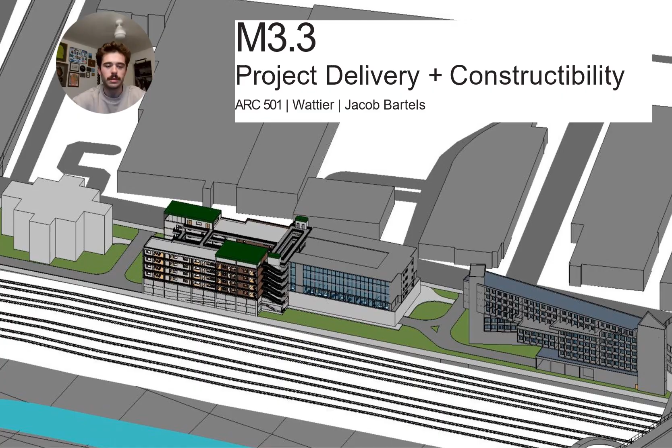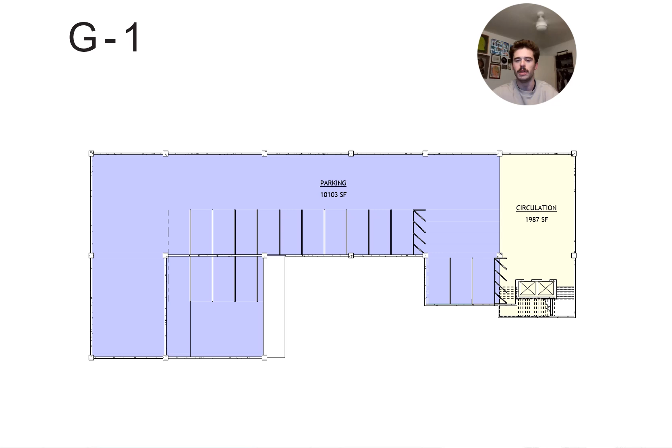So I ended up having to go down a level, which I didn't really want to do, just in terms of cost, and also being right next to the canal. I would imagine that it is not that easy to dig. I'm not sure, but it's relatively small, just pretty much like a half level of parking. Yeah, 10,100 square feet of parking, and then it's got little access to the circulation.

So here is ground level G1. You can see you come in the parking at the left there, bottom left of the screen, and you can go straight up the ramp to level 2, or you go left, down and around to down below. Obviously connected to the circulation, most likely going to be connected through to the parking garage of Lauren's building, adjacent to mine.

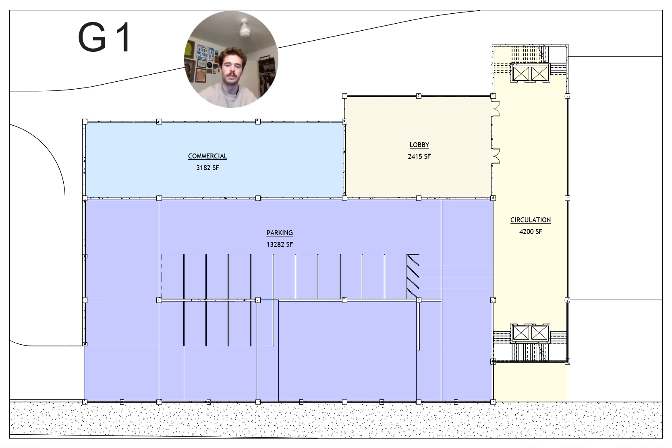Got the lobby and then commercial space. I'm yet to decide what the commercial space really is going to be, if it wants to be one commercial space or split it. So I'll have to figure that out. And then when you get up to G2, this is the last level of the podium, the concrete structure underneath. It houses a large mechanical room, and then that says lobby, but that's just open to lobby below.

And one thing that I did consider is just security in terms of public versus private access. Having the open air circulation definitely might pose a challenge in terms of security, especially being in the area we are, I guess. But you'll see in some of the axonometric views that I built up, there's really no access into the circulation unless you get above ground level.

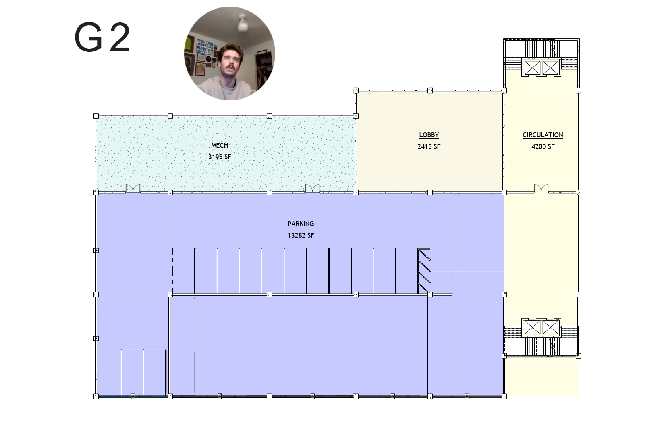So L1, this is the start of our steel frame structure and start of housing residential units as well. This one's got a big terrace down below, just because we've got the space on top of the podium and might as well take advantage of it.

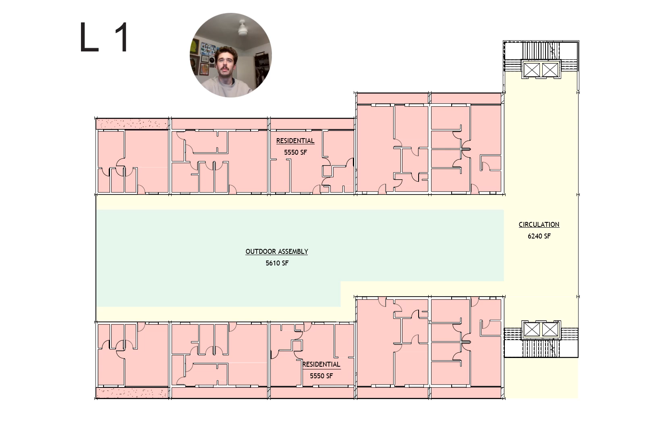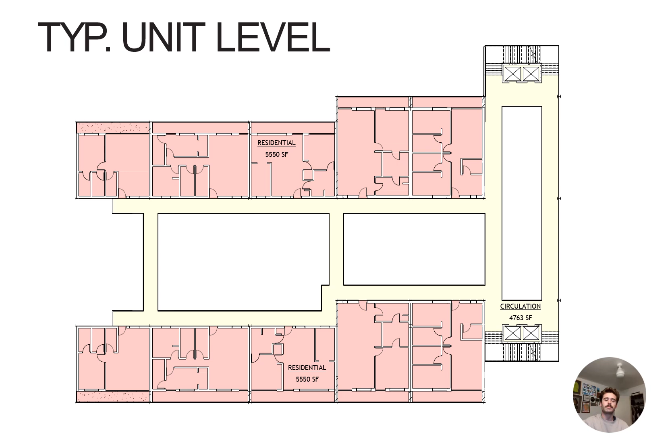So this is what a typical unit level is going to look like. I did end up having to add some kind of catwalk skyways across because I was dealing with some dead end corridors there. So just in order to meet that code, I had to add some bridges, but I think that it actually ended up being a cool little twist. I'm going to try to take a green hanging vegetation vibe on them, kind of inspired by one of my other precedent studies, the what was it? I'll get back to you on that one.

And then level 5 is the roof level here. I wanted to have kind of a mix of indoor and outdoor. Also, just a good spot to be housing any kind of amenities that we were going to need. This could be due to change around, how much of it's going to be indoor versus outdoor, whether it's going to be landscaped or patio, all of that yet to be figured out, but on the way soon.

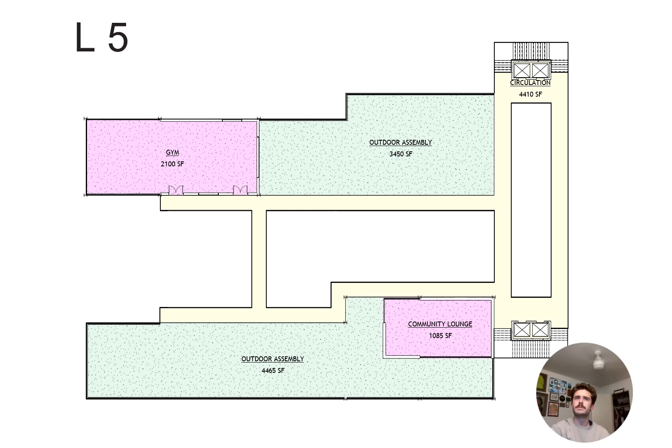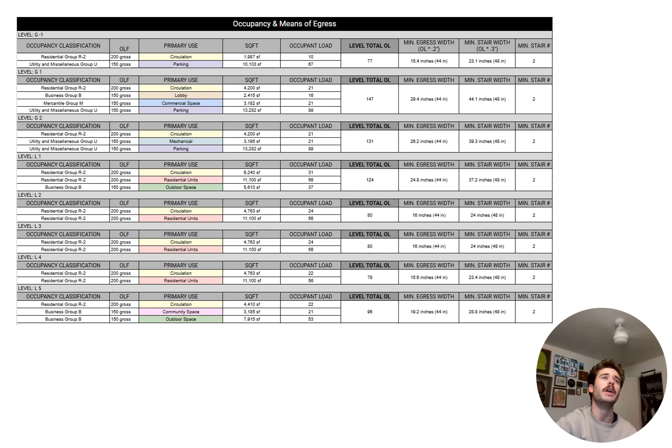Oh, in terms of occupancy, we have R2 residential for the residential units, obviously. And then in code, it mentions if you had an assembly space that had an occupancy less than 50, it is actually counted as a business group classification. So that falls under the business group B, 150 gross.

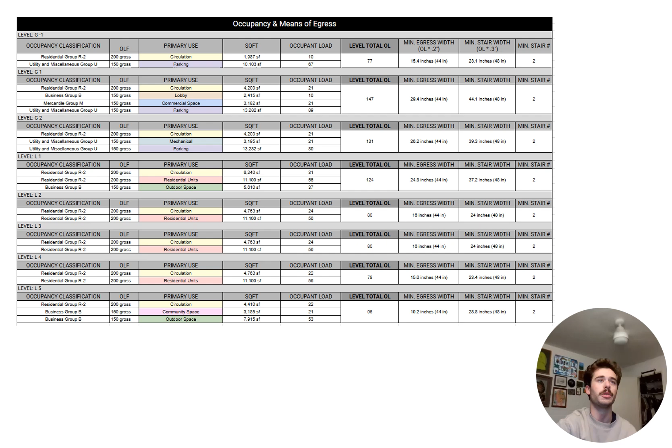And then mercantile group, I figured some kind of store or little shopping thingy for the commercial space. Utility and miscellaneous, I figured for parking and then mechanical as well. All pretty similar, either 200 or 150 gross. So it was pretty easy.

Here's my means of egress isometric. Like I mentioned before, I did have to end up adding in those little catwalks across, so I'm gonna play with that design a little bit more. But I definitely spent a lot of my time massaging out the grid structure and getting the parking garage figured out and laid out well. So that ate up a lot of my design time, I guess. So hopefully I'll be able to find some more time soon.

But you can see every floor from L2 really up to L4 is the same. And then you've got L5 is the roof, and L1 is going to have that terrace. So a little bit different on the bottom and the top. They all access those circulation cores on the end in the middle, sandwiched between modernized buildings.

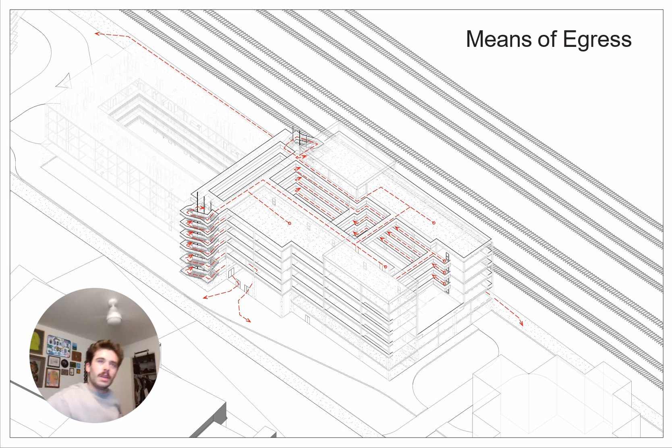Yeah, it's all open air. I found some stuff in the code about open air corridors, but I wasn't really sure, and I didn't have time to talk to Greg about it. So I went ahead and just counted them as corridors, but I'm not sure now that I'm thinking about it. Actually, there's always tomorrow.

All right, construction type and fire rating. So obviously I mentioned podium structure before. Bottom 2.5, 3 levels, I guess, are going to be that Type 1A, and then on top 2A steel structure. Just some building stats for you. We've got student unit. There's 8 of each type of unit in the building, 2 of each on each floor, residential. And you can see their little stats there.

5,610 square feet terrace, and then 7,915 a roof deck. So a lot of good community space, even though the building really takes up the majority of the footprint of the site, which is what I was trying to do. So I'll have to figure out landscaping in terms of that, and dive a little bit more into drainage and such. But looking forward to it.

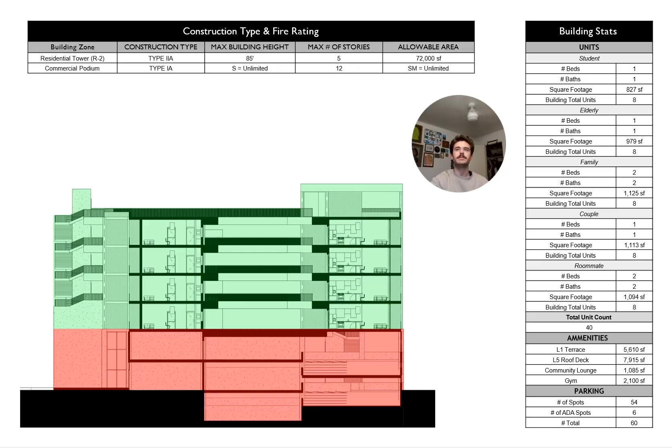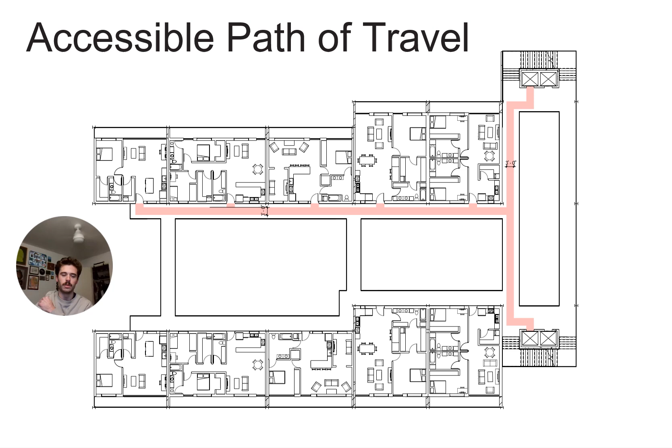So here's my accessible path of travel. I just realized I'm way over time, so I'm going to take it into high gear. All the units should be fine with accessible paths of travel. The corridors are all 6 feet wide, so there's plenty of room. Like I mentioned before, I didn't want those dead end corridors, so you can cut across if you need, or loop around. Like I mentioned, here's an ADA plan of the elderly unit specifically.

So here you can see my building section. On the left, you can see you go all the way up from ground to parapet, but I also wanted to blow it up a little bit bigger here to get a better look. So here, where I'm standing right now, I would be on G2, and down at the podium level, it's pretty simple. I just went with large 24 by 24 concrete columns, concrete walls, and then for some added security for the parking, as well as spicing things up a little bit, I still wanted it to be breathable and not just a closed off garage. So I wanted to go with a metal mesh material.

And then as you see on the right, as you move up into the steel structure, it switches over to a metal insulated panel, and you can see the measurements there in the breakdown. So on the exterior, you've got your 2 3/4 inch metal panel, and then there's going to be 1.5 inches of thermal air barrier, and then you've got 6 inches of metal stud, and that's going to have the insulation in there as well. And then you've got a vapor retarder barrier, and then gypsum board on the inside of the 6 inch studs.

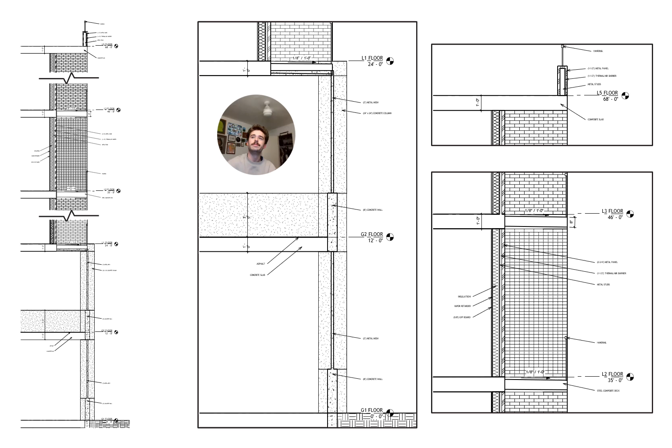I also wanted to point out the balconies here. So the slab structure is 1 foot thick, but then it drops down to 8 inches and slopes out to deal with some of the drainage. I figured that was worth mentioning. I'm way over time, so this is it.